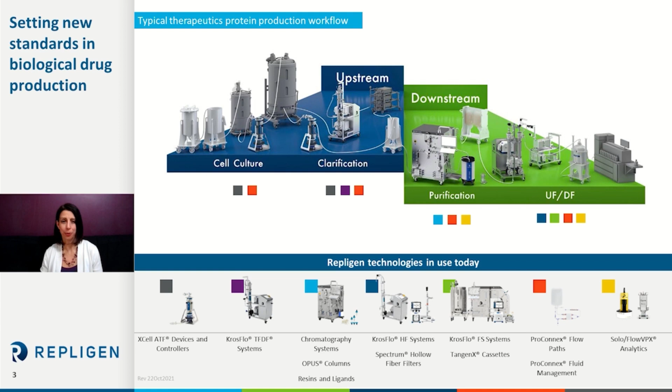So today we're going to talk about the new Repligen chromatography systems, and I know by the end of this presentation you're going to be just as excited to try it as I was when I first heard about it. For the Repligen chromatography system, every detail has been analyzed, and it's also been redesigned if necessary to maximize process efficiency for the needs of both the new modalities and traditional mAbs and recombinant proteins.

For existing chromatography systems that you're probably using today, you know there's dozens of built-in challenges all along the flow path, and especially for new modalities such as AAV or Lenti, we have to deal with issues such as low recovery, growing manufacturing costs, and faster go-to-market timelines. For these new modalities, we really need modern technology designed specifically to address those needs.

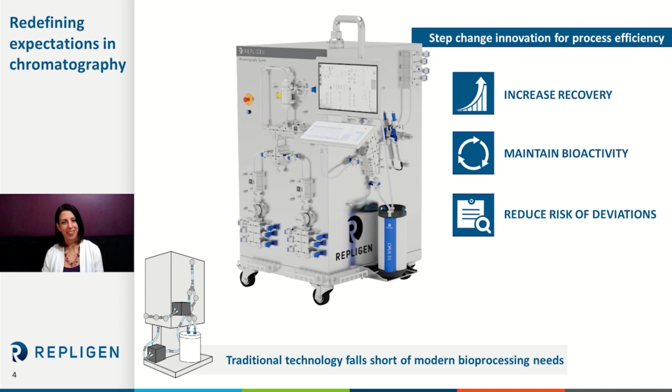To maximize process efficiency for even these most complex viral vectors, it really requires a step change improvement in technology. Over the next few slides, I'm going to talk about this — increased recovery, protecting your bioactivity, and reducing the overall risks of deviations. This didn't happen overnight, of course. There were decades of component and system evolution that led to the chromatography skid that we're going to talk about today.

The team behind these systems has been in downstream bioprocessing since the very beginning. Back when I had really big hair, lots of hairspray, and I was blowing up my speakers to some hair bands and rock ballads, way back in the 80s, we were there. And from then on, over time, the team here made step change improvements.

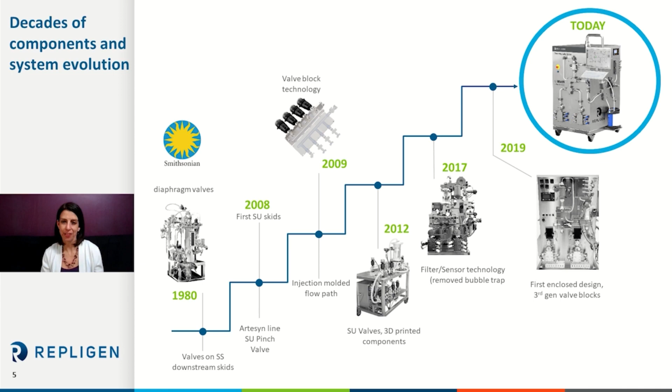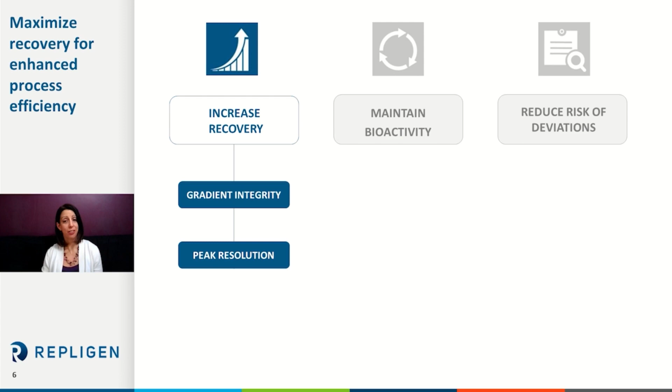There are three key elements of process efficiency, the first of which is recovery. Maximizing recovery really comes down to protecting your gradient integrity, both going into the column and then also maintaining peak resolution from the column exit to the collection vessel. The biggest challenge to both gradient accuracy and peak resolution is really the turbulence and the dilution, and we're going to cover these challenges and our solutions here at Repligen in the coming slides.

Separation requires control both before and after the column. Creating a gradient is really not hard, but maintaining that gradient is the challenge. That gradient integrity must be maintained from the mixing valve to the column, but we also must protect the peak resolution coming off of the column so you're able to collect the maximum product from the process. Both before and after the column, you have potential dilution, potential turbulence, and increased time that also leads to increased potential diffusion. All of these factors erode resolution, but we've developed multiple technology solutions to solve these potential issues, the first of which is the bubble trap.

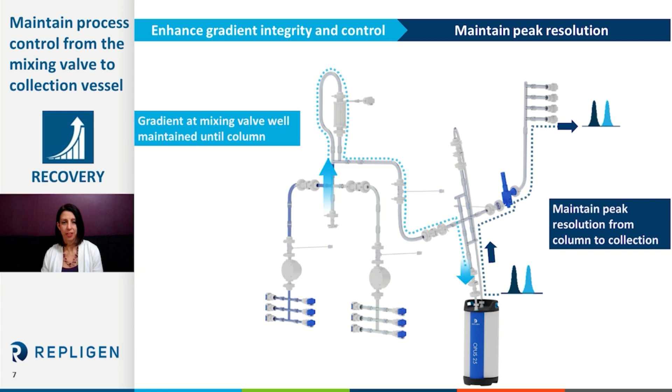We've had a unique and innovative solution to replace the bubble trap with a filter and level sensor-based alternative, minimum dilution solution. Conventional bubble traps, as you know, can contain up to 500 mils of additional buffer volume that can significantly erode your gradient integrity through dilution. So the gradient that you set at the mixing valve travels to the bubble trap and is then instantly and unpredictably diluted, which erodes precision and reproducibility.

As an alternative, Repligen utilizes a filter, level, and sensor assembly that drastically reduces holdup and creates minimal dilution. This means that the gradient you set at the mixing valve can also be the gradient delivered to the column. I'll talk about this more in a later slide when I show you a video, but some of the benefits include better separation and repeatability from run to run.

Another way to improve recovery is the removal of dead legs in the single-use flow path. The Repligen valve block technology virtually eliminates the dead legs caused by hose barbs used in your traditional flow path. Traditional systems use individual valves spaced far apart due to the use of these hose barbs, and the pinch point of the valve must be placed far away from the main line. This creates significant dead legs and also increases the chances of leaks and failures.

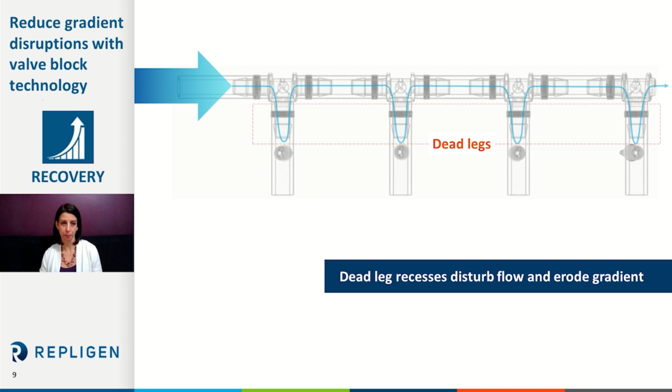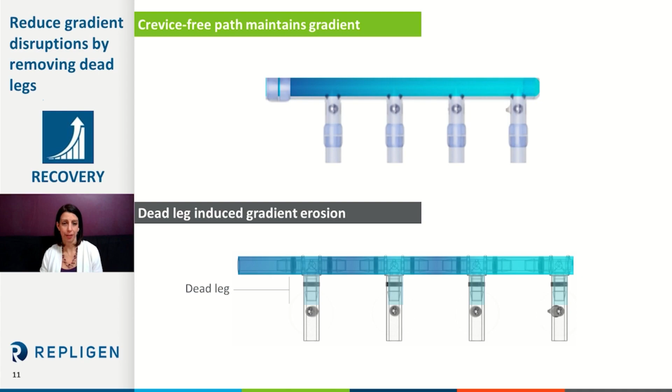Next we're going to see a little video. The animation shows a transition from a traditional flow path with wide spacing and dead legs caused by hose barbs, to a shorter spacing with no or minimal dead legs.

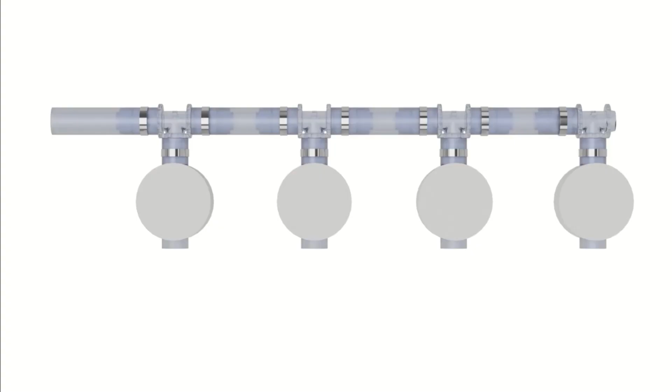You start with the tubing design, which shows a traditional valve setup. The silver bands here represent the zip ties or possibly Oetiker clamps, and the discs are the valves, with the hose barbs visible through the tubing. The magic happens when we remove those pesky hose barbs. With overmolds and injection molding, we simply don't need them. By removing the hose barbs, we bring the pieces closer together, shorten and simplify the flow path, and put the pieces back together with new pinch valves, now you have minimal dead legs.

As you can see in this close-up version of what we just discussed, in order to promote laminar flow and reduce turbulence, we have reduced the number of connection points and replaced those pesky hose barbs with overmolded connections throughout the flow path. The connections are seamless and hose barb free, with a constant inner diameter. They allow for unobstructed flow with no turbulence, improved gradient integrity, and they maintain peak resolution between the column and the collection vessel.

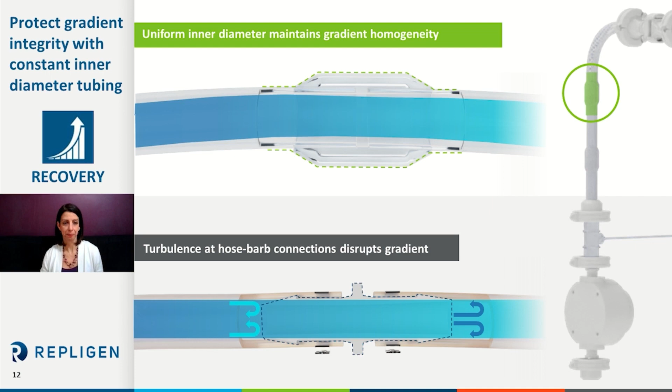As we've discussed, the Repligen valve block technology and overmolded connections protect the gradient resolution from the mixing valve to the column, but they also help protect the peak resolution as it travels from the column to the collection vessel. Separation happens at the column and is optimal at the point when it leaves the column.

Those of you used to working at small scale or PD scale might ask, how are we going to have dilution post column? What happens in larger systems is when the first sample comes off the column, it elutes into the buffer, and the longer it stays in the tube, the more diffusion might happen.

Turbulence also occurs when the flow path changes geometry from the outlet of the column into the flow path. At Repligen, we've re-engineered this so the flow path has less diffusion, virtually no turbulence-inducing dead legs, and is significantly shorter due to the valve blocks we've already discussed. We've seen a 4-time reduction in dead volume, which also equals less dilution.

As I mentioned, there are 3 key elements of process efficiency, and the second we're going to talk about today is the protection of your bioactivity. Maximizing recovery is only successful if that recovered product maintains bioactivity, because of course nobody wants to achieve high recovery of an inactivated biomolecule.

When manufacturing more fragile products such as lentivirus-based therapies, shear really is one of the biggest threats to product integrity. We have a lot of unique features that can reduce turbulence and shear and consequently maintain bioactivity of your sample. We use low shear diaphragm pumps, and we allow for increased pressure and low pulsation.

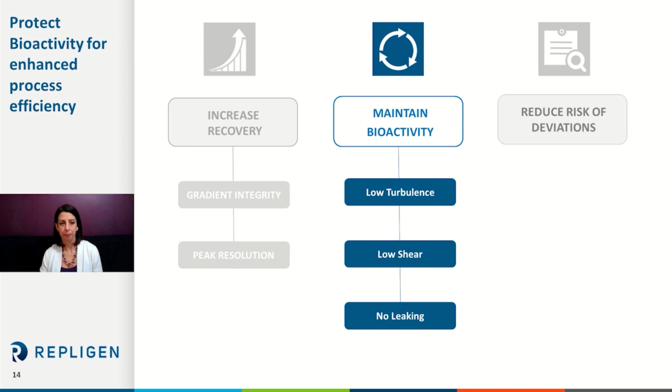This next slide shows in greater detail how the overmolded connections can really replace traditional hose barbs and create low turbulence connections that also don't leak. The overmolded connections replace the hose barb, promote laminar flow, and reduce turbulence.

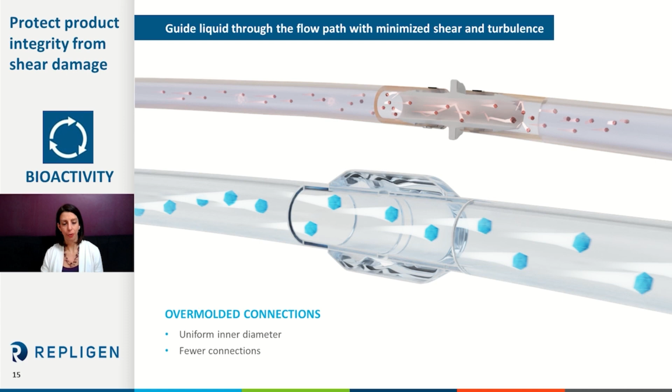The third and final key element of process efficiency is the reduction in deviations. We've really paid attention to this because we love our operators and we want to make their job easier. Reducing the overall risk of deviations through improved design and a strong focus on user experience, with the operators in mind, we want to make sure they're happy and everything is easier.

Through this diligent focus on user experience, we've reduced the risk of deviations through time reduction and fewer operator errors through ease of use. Over the next few slides, the overall user experience surrounding batch changes will be discussed, and you're going to see how it's safer, how it's easier, and more importantly, how it's faster.

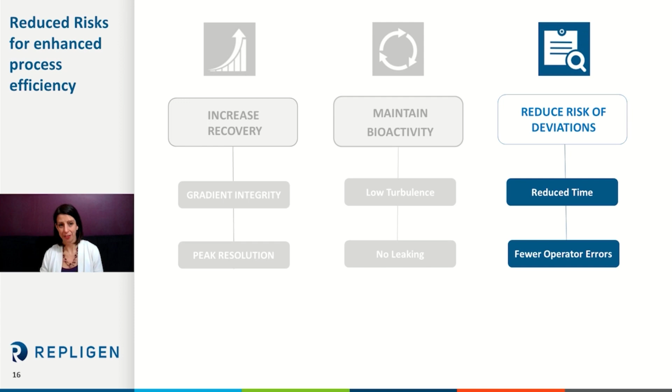With single-use systems, batch changes in the design of the flow path itself can cause challenges and ultimately lead to deviations. At Repligen, we've designed a simpler, better designed user experience that not only saves time, but more importantly will lead to fewer operator errors.

Comparing that to the traditional flow path, you see that we have 2 steps, the autoclave step and the calibration step, that are completely removed from the workflow. It only requires 1 operator instead of 2, and it installs in minutes and not hours. This is where we see operational simplicity that improves execution metrics and reduces potential failures.

The user experience around batch change on a traditional system is typically too long and complex. It wastes valuable time and resources, and most likely requires a second pair of hands, as we've mentioned.

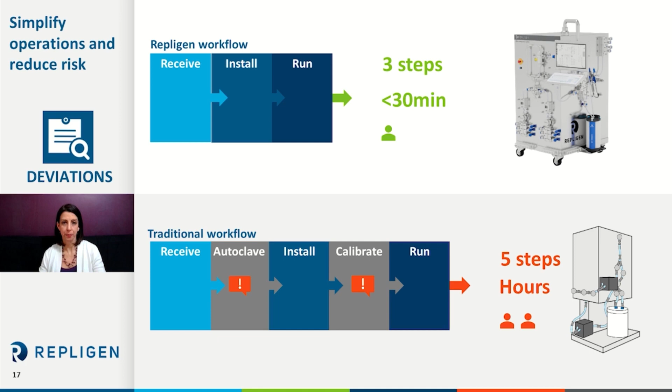In this next slide, you'll see in a little more detail the Repligen solution. Thanks to key changes in the system design, the batch change user experience is faster and easier, with less room for human error and requires fewer setup steps.

The flow path arrives in 4 pre-assembled gamma irradiated subsections. All single-use components have already been assembled into the flow path. It's intuitive, there's no tools, and virtually no mistakes. The user also doesn't need to calibrate, and as we've mentioned, all the sensors in the system come pre-calibrated. Once the flow path is on the system, just connect the 3 aseptic connections, and you're ready to rock.

The flow path remains closed from receipt to running, which in addition to reducing operator errors, really greatly reduces the contamination risk. So it's popcorn time again.

We're going to show you another video, a flow path installation on a Repligen chromatography system, so you'll see how easy and mistake-free it is. In this example, we see a 1/4-inch system.

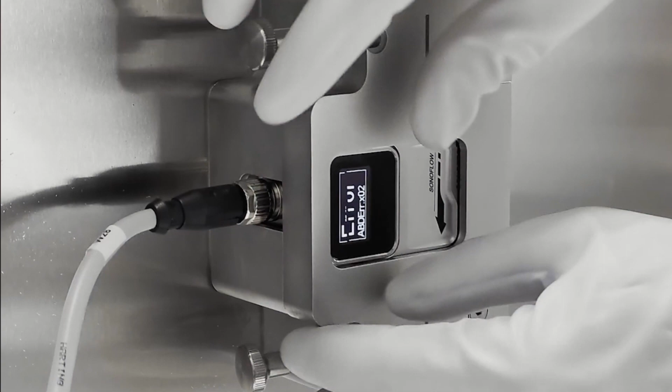The first thing you'll see is the flow meter, that silver cube with a small display. No need to worry about the error, it's a demo video. These are installed first, and the flow meter is placed inside the stainless steel exoskeleton to guide the installation and protect flow path integrity. The block opens and closes simply with locking knobs, no tools necessary.

Next, we see the valve block. You have organized junctions of tubing and multiple valves to control the flow. The user closes the block around the tubing, securing it, and again, no tools required.

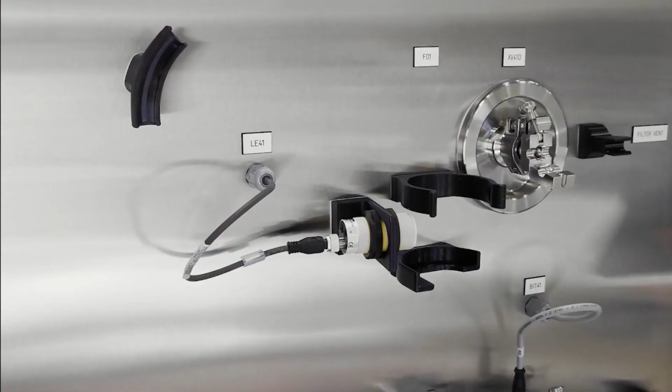Next, we see the filter-based bubble trap. The level sensor is installed, and the sensor detects liquid in the bubble trap filter. It controls a valve to the right that acts as a vent to release any unwanted air, and that will protect your column.

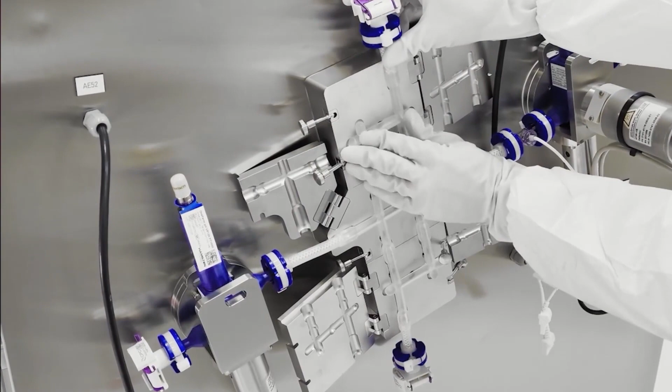I also want to note the tubing. Anything not in an exoskeleton is braided tubing, which is stronger and withstands higher pressures. But the exoskeleton that holds the non-braided tubing inside the valve blocks allows that tubing to operate at higher pressures, which lets us use cheaper tubing that's easier to install, and of course it's cheaper for your manifold. At the end of the video, you'll see 2 more valve blocks, and once again, no tools required.

Now that you understand some of the key innovative features in our Repligen skids, we also want to make sure these core technologies scale from 1/4-inch ID all the way up to 1-inch ID. The only difference you'll see is the system capacity and size, so that scaling uses the same differentiating core technologies regardless of scale.

Some of our competitors, as you probably know, unfortunately use different equipment from scale to scale. They may use peristaltic pumps and reusable tubing at small scale, then transition to a diaphragm pump and single-use at larger scale. This is not the way we want to maintain consistency across scales, and this is not how we do things at Repligen.

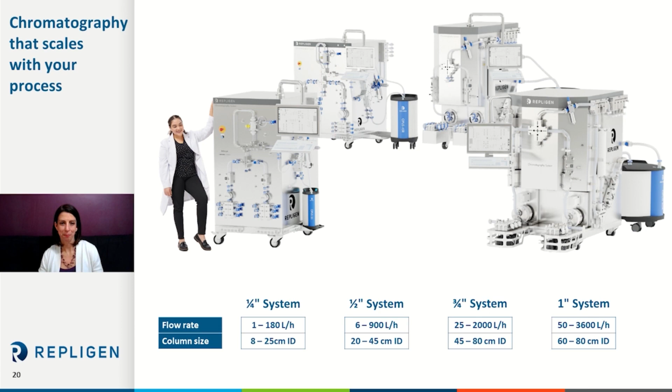In addition to all the features we've talked about today, I wanted to call attention to the fact that we have a solid supply chain. Repligen takes the supply chain very seriously. We design, engineer, and manufacture a lot of these components in-house. We also have a more than 150,000 square foot facility expansion ongoing to further expand those capabilities and cater to the growing demands for the systems.

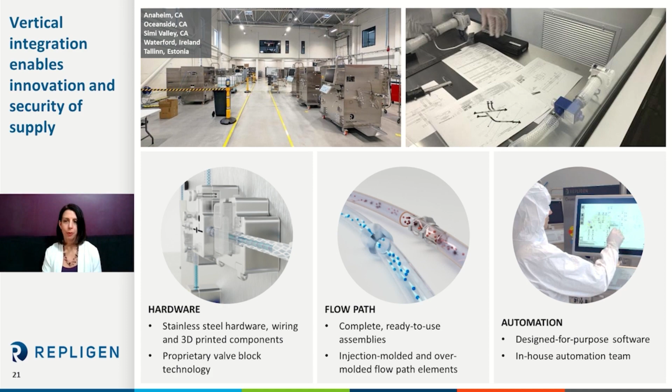So after this webinar, if you're ready to go out and purchase a system, we want to make sure we have the capacity to support you.

Finally, I want to mention that Repligen offers multiple technologies that can create additional efficiencies in the chromatography unit operation in addition to this skid. In order to achieve the step change improvements required for today's purification applications, we've developed or acquired multiple new technologies to work in conjunction with our systems.

The first of these is an affinity resin development platform that can generate custom affinity resins with first pass success in only 3 to 5 months. That's right, 3 to 5 months with first pass success.

Next, the first and only sodium hydroxide stable catalog of affinity resins is now available. The first launches were for AAV2, AAV8, and AAV9, with more coming soon. If you're interested in any of those 3, let us know and we can pop a sample in the mail within the week.

And then finally, the market-leading Opus columns. If you're not familiar with these, you really need to look into them. We have columns ranging from 50 microliters to 80 centimeters, and they allow that purification suite time to be used for productive chromatography rather than column operations such as packing, qualifying, and unpacking. And I know I keep mentioning how much we love our operators—having a pre-packed column will definitely make your operators happy.

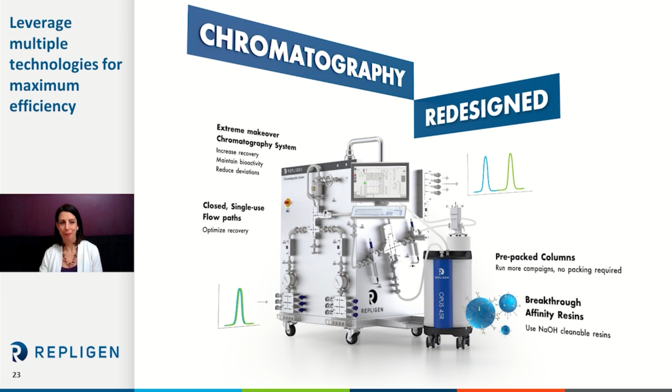So in closing, the Repligen chromatography system can deliver higher recovery with a more active product with simplicity. I would like to thank you for your time and attention today. Hopefully you're just as excited about this chromatography system as I am. And I'd like to turn it back over to Lise so we can have some questions.